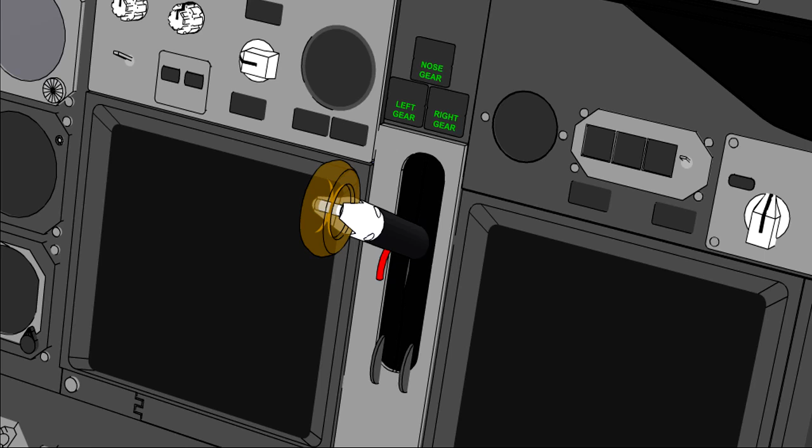In this lesson, we will look at the indicating systems used to keep the crew informed of the position of the landing gear. We will then look at a typical hydraulically operated landing gear extension and retraction sequence.

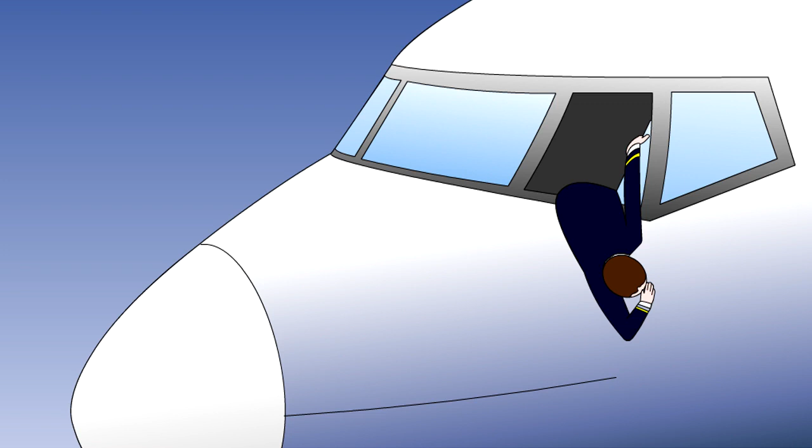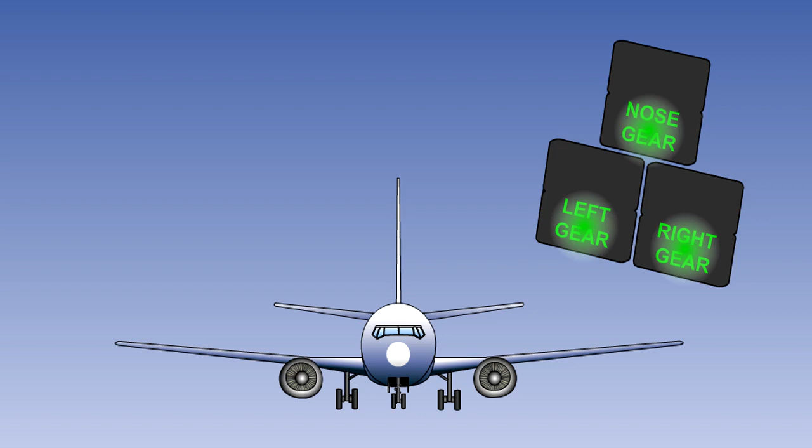Although the landing gear, when selected down, may be at least partially visible from the crew compartment, it is not usually possible to be certain, by looking at it, that each landing gear is securely locked down. An electrical indicating system is used to provide a positive indication to the crew of the operation of the locks and the position of the landing gear.

The system usually consists of microswitches or proximity sensors monitoring the up and down locks. These make or break electrical circuits when the locks operate, causing indications to change on the landing gear position indicator on the instrument panel.

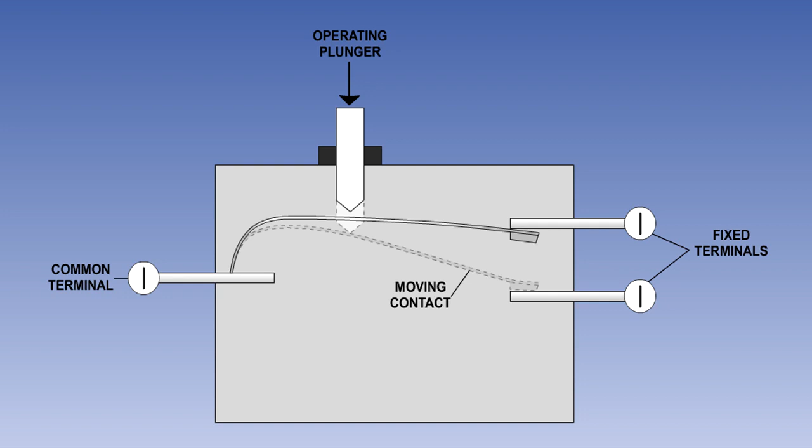Microswitches are simple, mechanically operated electrical switches, which are operated by a striker plate when the gear reaches the required position.

Most modern aircraft now use proximity switches. These are electronic devices with no moving parts. Each proximity switch consists of two components, a sensor and a target. When the sensor and target are in close proximity, a switch will be made.

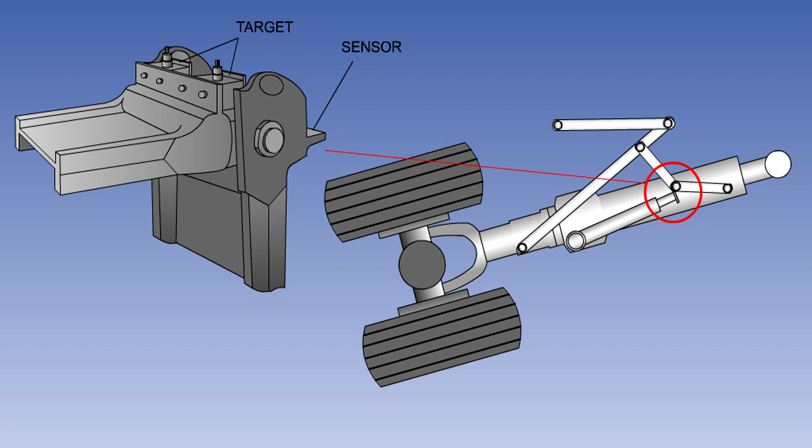The picture shows the proximity sensors on a gear-down geometric lock. When the jury struts move to the over-center position, the sensor and the target move into close proximity, and a gear locked down signal is sent.

The sensors are usually duplicated for safety reasons. Microswitches and proximity sensors are fully explained in the electrical systems lessons.

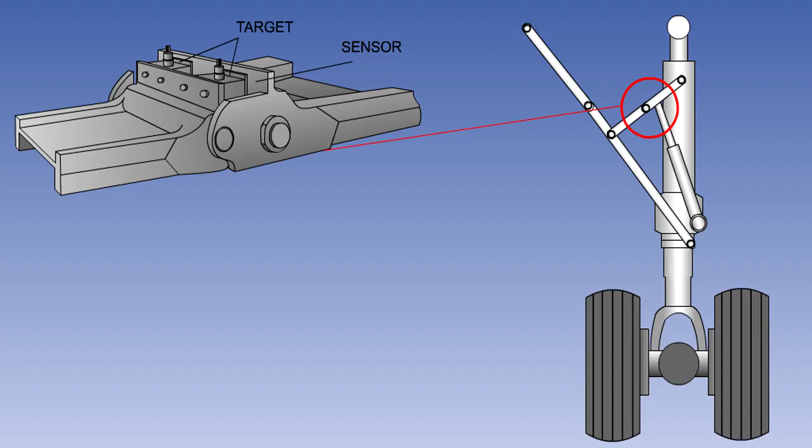Mechanical indicators may also be provided to show that the landing gear is down and locked if the electrical indicating system fails. For the main gear, these are often just buttons which pop up on the top of the wing when the gear is locked down.

They can usually be viewed from the fuselage windows. The nose gear will often have some sort of periscopic viewer in the cockpit floor through which the downlock can be seen. Some aircraft don't have mechanical indicators.

Instead, they have duplicated electrical downlock sensors.

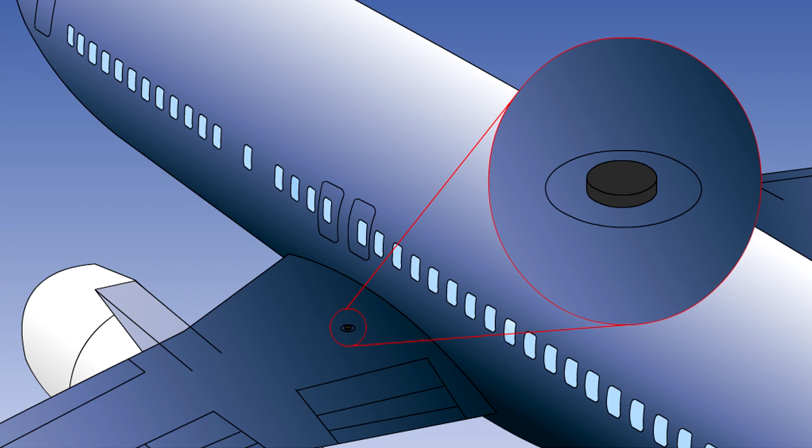On most modern aircraft, the electrical landing gear indicating system operates in such a manner that a green light is displayed for each gear when it is locked down. A red light is displayed when the gear is not locked in the selected position, and no lights are visible when the gear is up and locked.

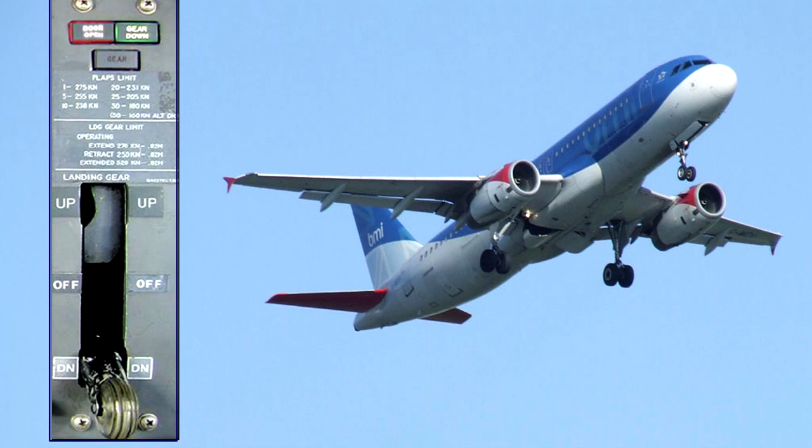Bulbs are usually duplicated to avoid the possibility of false indications as a result of filament failures. Many large aircraft also have main gear door lock indicators to indicate that the hydraulically operated doors are closed and locked. These lights may be red or amber.

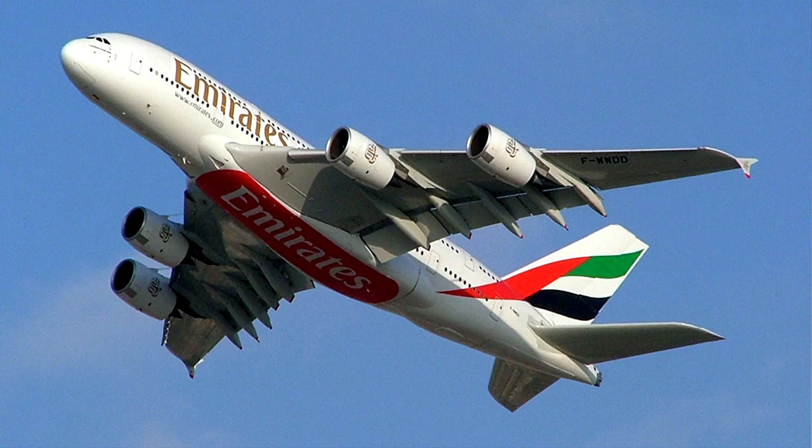Landing gear retraction systems can be hydraulic, electrical, or pneumatic in their operation. Here we will explain the operation of a hydraulically operated system. Pneumatically and electrically operated systems function in a similar fashion.

Most modern commercial aircraft have hydraulically powered landing gear systems. The hydraulic power is normally supplied by the engine-driven pumps. There will be a backup system available in case of pump or engine failure.

On some light aircraft, a self-contained power pack is used. This houses a reservoir and selector valves for the landing gear and flap systems. An electrically driven pump may also be included, or the system may be powered by engine-driven pumps.

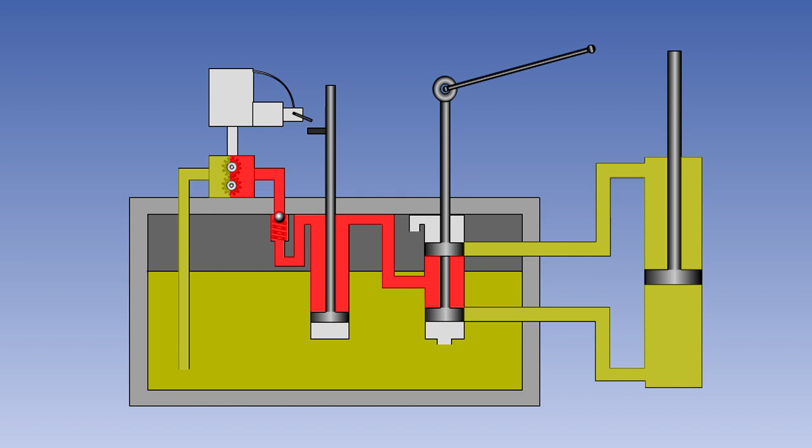The diagram here shows a typical hydraulically operated main gear in schematic form. It has a number of components that were described fully in the hydraulic systems lessons.

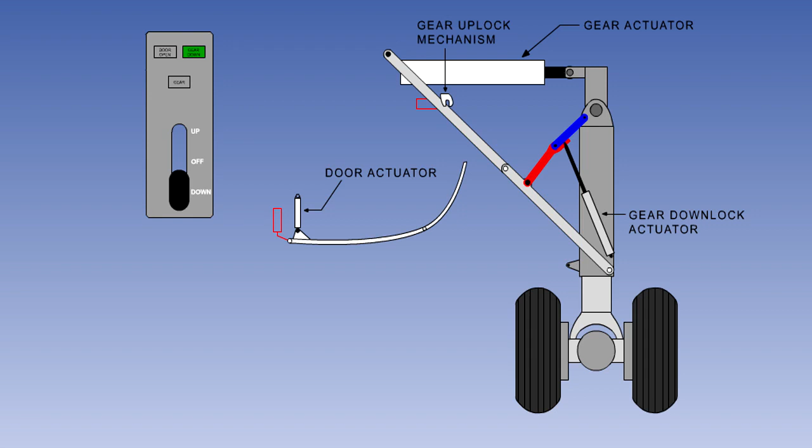The gear actuator and door actuator are double-acting unbalanced actuators. The gear downlock and uplock actuators are spring-applied and hydraulically released. The gear is locked down by a geometric lock mechanism. There are two sequence valves controlling the sequence of gear and door operation.

The two hydraulic lines from the selector are known as the up line and the down line. The up line is pressurized when the gear is selected up, and the down line is used for return fluid. The roles are reversed when the gear is selected down.

The door is hydraulically opened and closed. It is closed when the gear is locked up or down. It opens to allow the gear to raise or lower.

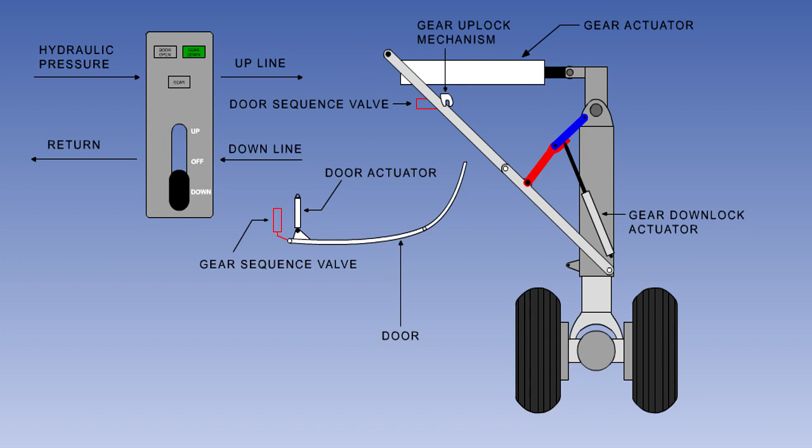We will now look at the sequence of gear and door operation and the associated light indications that you can usually expect to see on a modern airliner. For simplicity, we have only shown one main gear. However, the other main gear and the nose gear operate in the same manner.

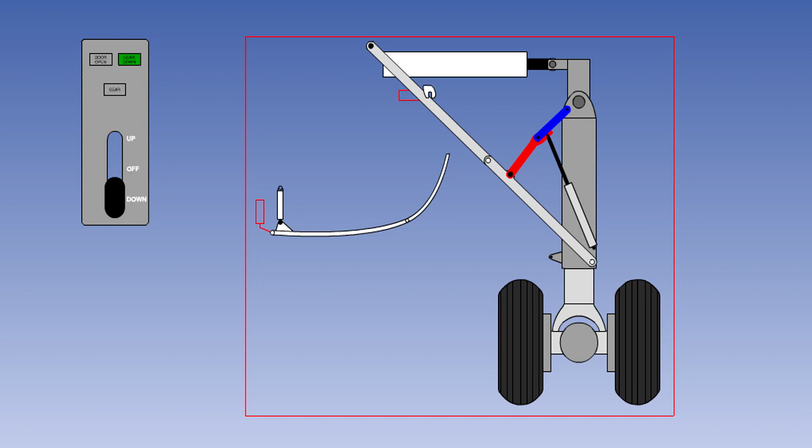The gear lever will be within easy reach of both pilots, and the gear indicator lights are usually adjacent to it. The lights indicate the status of each individual gear. For simplicity, we will only show the lights for one gear when looking at the gear sequence.

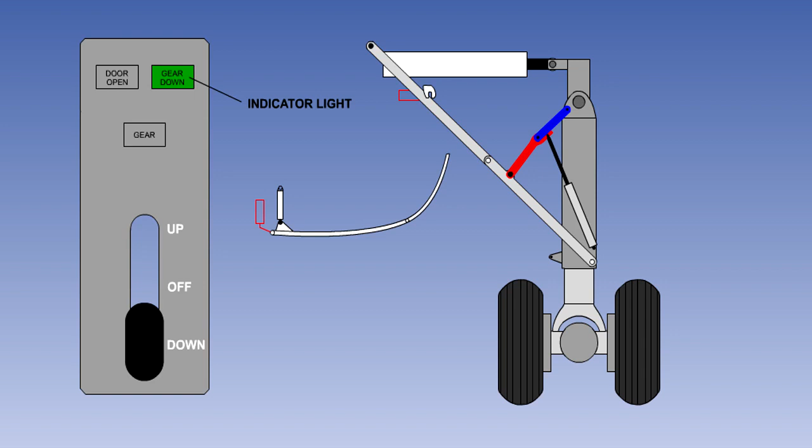With the gear lever in the down position, the gear locked down, and the hydraulically operated doors closed, the green gear down light will be on and the door open light will be out.

The gear red light is a disagreement light. It illuminates any time the gear and the lever are in disagreement. So when the gear is selected up, the first thing that happens is the gear red light illuminates. However, the gear is still locked down, so the green gear down light remains.

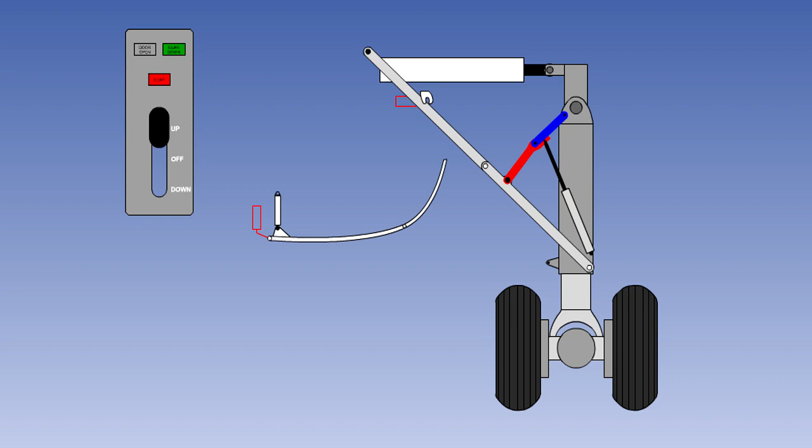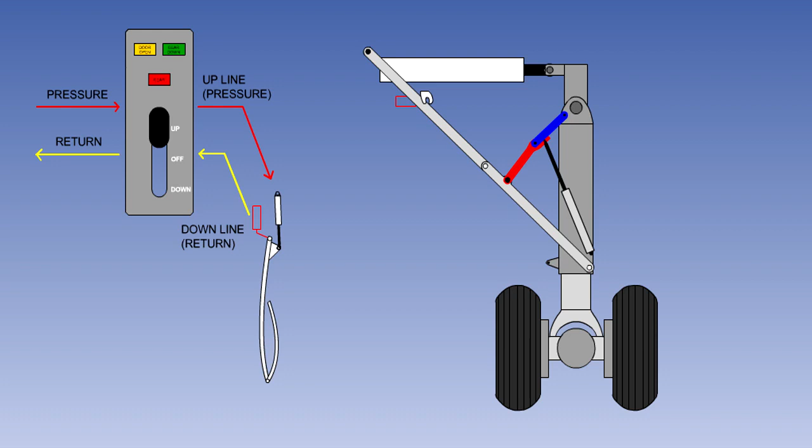The selector valve controlled by the gear lever will send pressure fluid to the door actuator. The door now begins to open and the door open light illuminates. When the door is fully open, its gear sequence valve will redirect the pressure fluid to the gear downlock actuator and the gear actuator.

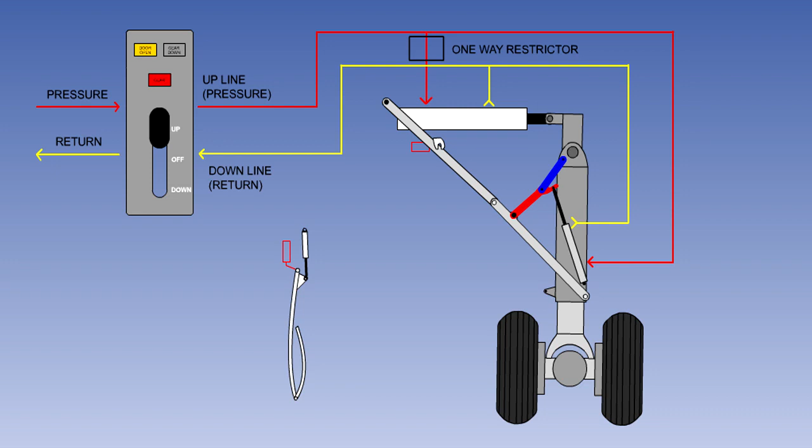The pressure fluid passes through the one-way restrictor valve in the full flow direction. The downlock actuator will begin to retract, breaking the geometric lock. The gear is now unlocked, so its green gear down light will go out. The gear actuator can now raise the gear.

When the gear is fully up, the uplock roller will engage with the uplock actuator, causing, with spring assistance, the actuator to rotate, locking the gear up. Once the gear is locked up, the red gear light will go out.

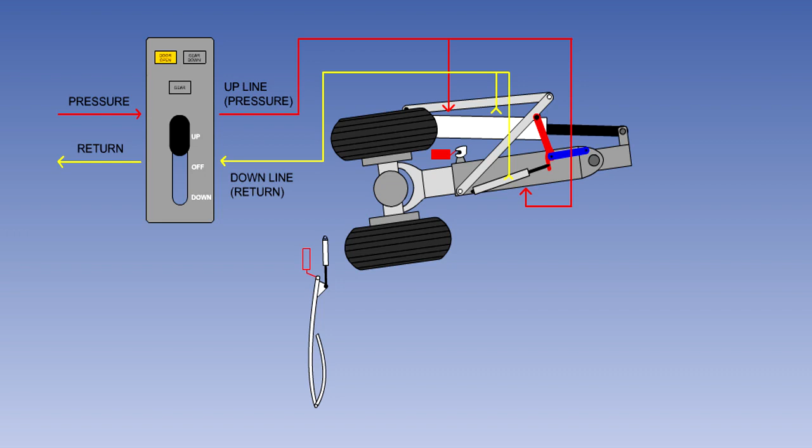The door sequence valve now directs the hydraulic fluid to the door actuator, and the door closes. Once it is fully closed, the amber door open light will go out. With the gear up and doors closed, there will be no lights on the indicator.

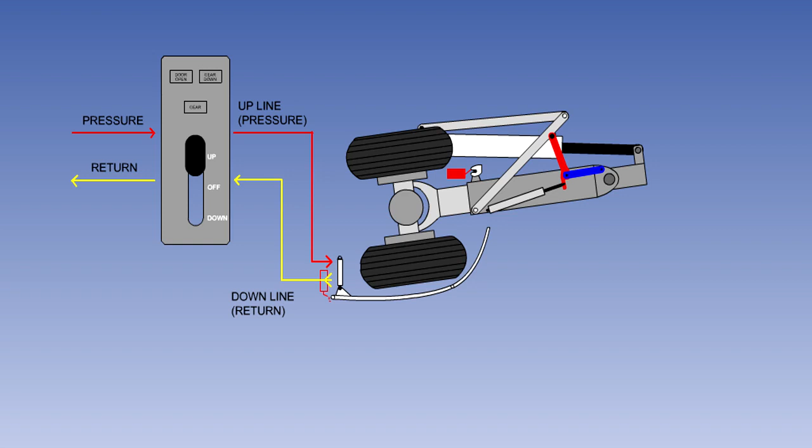Once the gear is up and locked, and the door is closed, the gear lever is placed to the off position, leaving the gear unpressurized for the period of the cruise, so extending the life of the landing gear components and preventing unwanted leakage of hydraulic fluid.

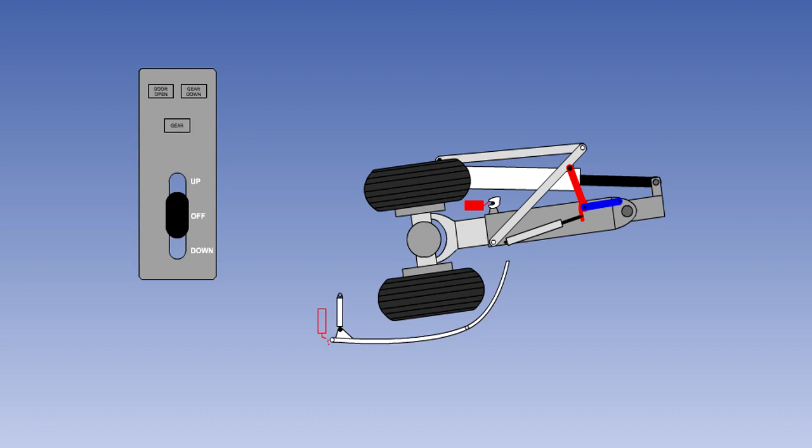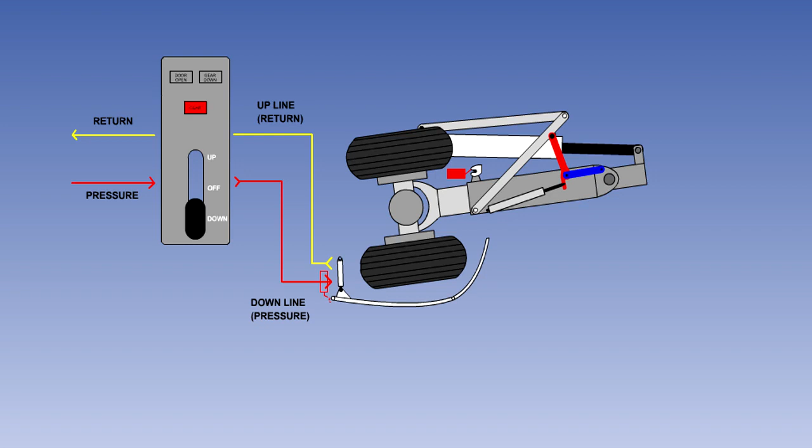The sequence when the gear is selected down is basically the up sequence in reverse. When the lever is selected down, the red gear light comes on to indicate a disagreement between the lever and the gear. At the same time, fluid is directed to the door actuator. The door will open and the door light will come on.

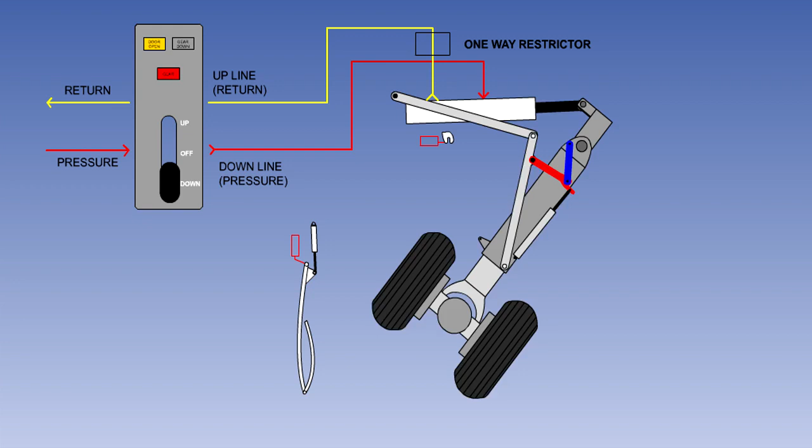When the door is fully open, the gear sequence valve will redirect the hydraulic fluid to the gear up-lock actuator and the gear actuator. The up-lock mechanism will rotate, releasing the gear. The gear actuator will now lower the gear, assisted by the weight of the gear.

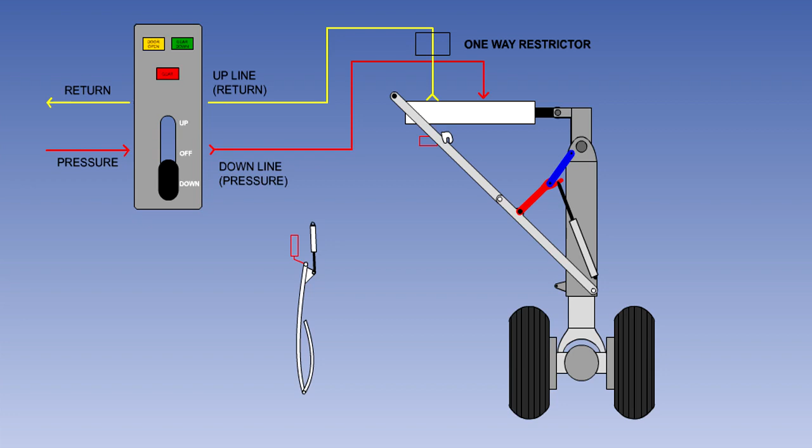To control the speed of lowering, the return fluid from the gear actuator passes through a one-way restrictor valve in the restricted flow direction. You may wonder why the restrictor is in the up line and not in the down line. When the gear is going down, pressure fluid is passing through the down line and the up line is used for return.

Also, if the gear has to be lowered under its own weight, without hydraulic pressure available, the fluid displaced from the actuator will still pass through the restrictor, so the speed of lowering will still be controlled.

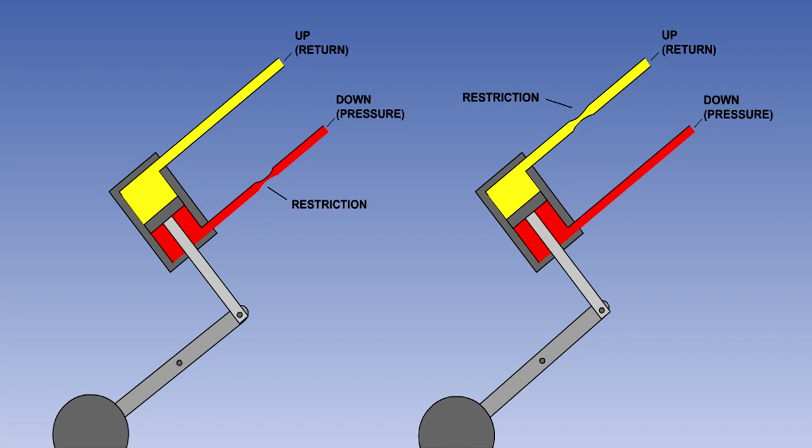When the gear approaches the fully down position, a powerful spring in the lockdown actuator will push the geometric lock over center, locking the gear down. The red gear light goes out and the green light comes on.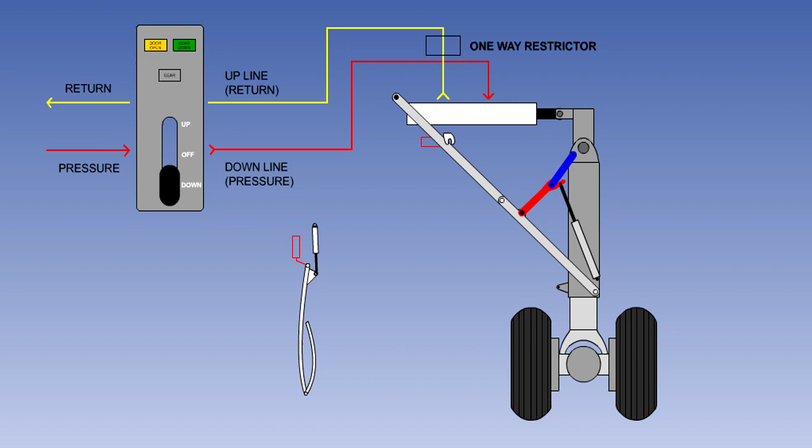Once the gear is locked down, the door sequence valve directs fluid to the door actuator, and the door closes. The door light goes out.

Newer aircraft with large LCD screens will normally still have independent landing gear position indicators, but they also have the ability to provide further information about the landing gear system on a screen, as in this Airbus A320 Electronic Centralized Aircraft Monitor, or ECAM presentation.

When the gear is locked down, there are green, down-pointing triangles on both the undercarriage indicator and on the ECAM screen.

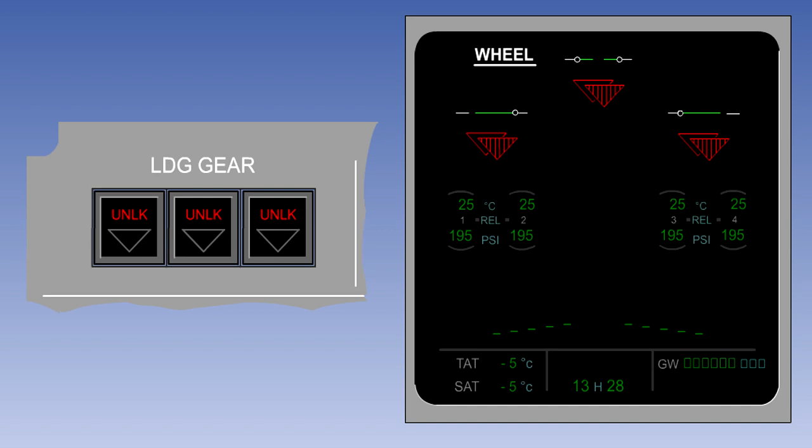When the gear is neither locked up nor down, the triangles on the ECAM screen are red and unlocked is displayed on the landing gear indicator. And when it is up and locked, the displays are blank.

The door positions are depicted by the symbols highlighted here. They are green when the doors are locked closed, and amber when they are not.

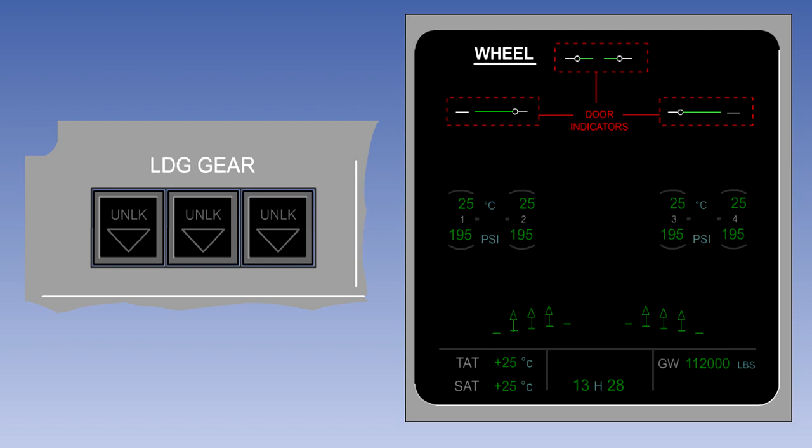To summarize gear indications, the most important indication is for gear down. This is almost invariably indicated by a green light or lights. Red lights are normally used to indicate that the gear is not locked in the selected position. And lights out usually indicates gear up and doors closed.

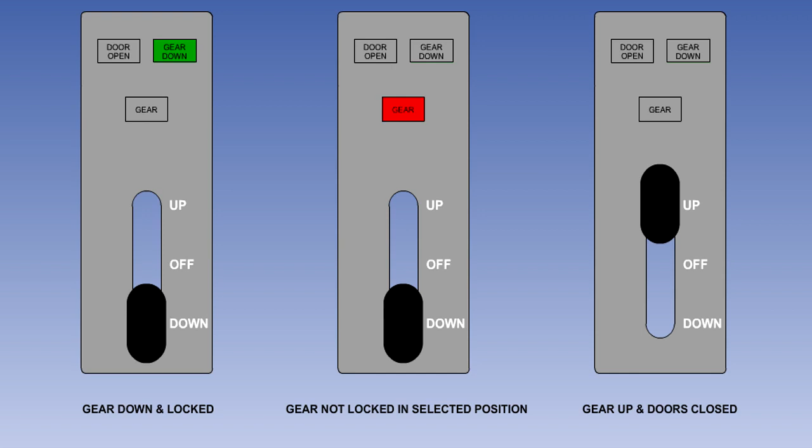You should now have an understanding of how undercarriage extension and retraction is accomplished hydraulically, including the purpose of the sequence and one-way restrictor valves.